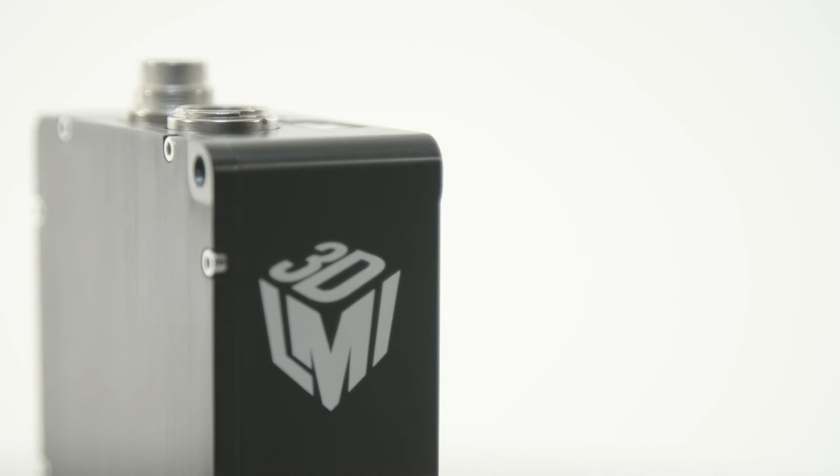I want to give you a demonstration of the Gocator 2300 series laser line profiler, which is a 3D smart camera for 3D measurement and control for factory environments. The laser line profiler is a product from our smart 3D sensor families, and this particular line profiler has a 1.3 megapixel imager in it and gets high resolution, high speed scans for profiling and surface generation. This model, the Gocator 2330, has a laser line generator and a camera, as well as a full processor on board for a complete tool set to allow a user to craft their own applications on board and do measurement and control in a factory environment.

So let's get started. We're going to set up a gantry and start scanning.

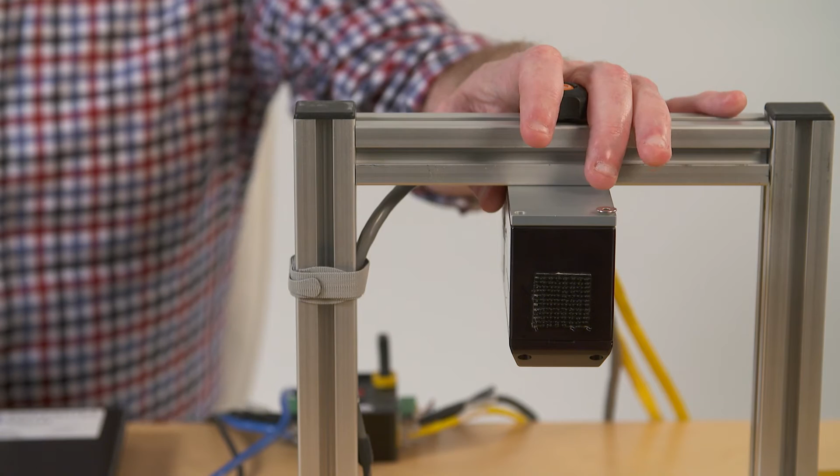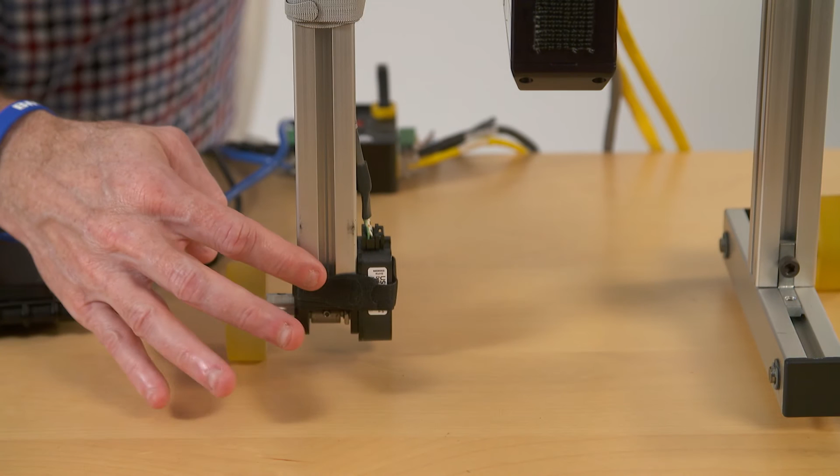We've got the sensor mounted to the gantry at a position where the proper standoff is set up to the far end of the measurement range. On the gantry we've got some wheels, including this wheel having an encoder on it so that we can track our motion when we do scanning.

It's connected through a small connection device and Ethernet into my laptop here. One great thing about the Gocator is that you don't need any separate software to program it. It works off of browser-based software, so any standard browser would allow you to set up your Gocator.

So we've mounted the sensor on the gantry, we've assembled the gantry, and now we're ready to start scanning. I've got a browser window open, in this case Firefox, and we just need to open up a new tab. I'm going to put in the IP address of the sensor, which is a standard IP address that we ship it with. Users can change that IP address to whatever they like. And here's the login screen.

Once inside the user interface, I have a number of screens to go through in chronological order. This is the manage screen, where users can change their IP addresses, set passwords. We have areas where you set up job files, save job files, as well as upgrade firmware, things like that.

Then there's the scan screen. The scan screen is where users can optimize the scan, change exposure, change speeds, things like that, to get profile scans. There's a model screen, which is for pattern matching when needed, and a measure screen. Once the scans are optimized, users can use the measure screen to create profile tools and surface mode tools.

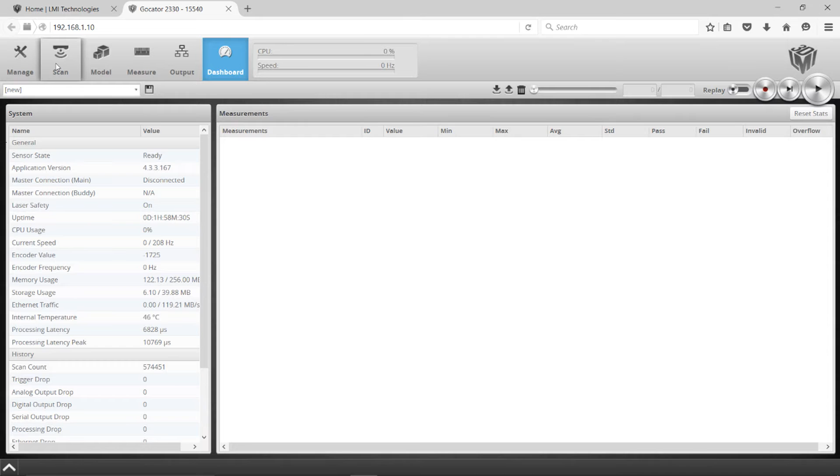So we're going to move back to the scan screen and turn on the sensor. You can see the laser line here, and I'm just going to put my fingers in there and we're looking at a live scan. Right now we're measuring this 200 times a second, so we get over 200 profiles per second. Users can increase that speed. And in each one of these profiles we get over 1,200 points, so we're actually generating somewhere around 250,000 points per second.

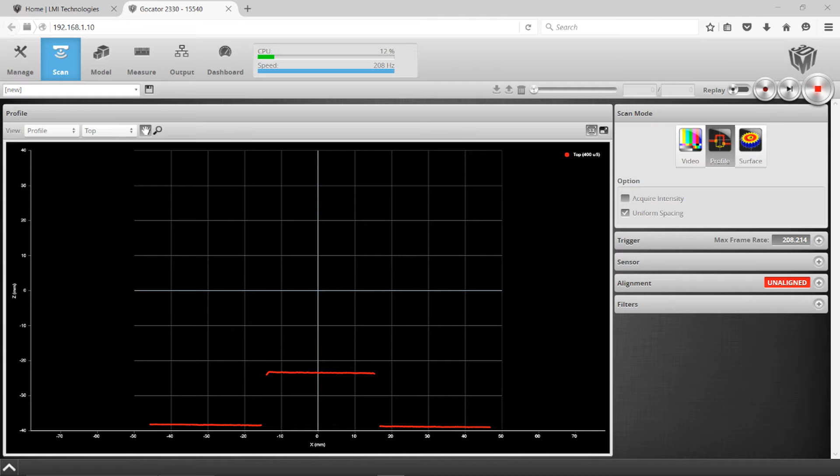Okay, so let's scan an actual object. I'm just going to put this wood block in there under the laser and we'll look at that profile. If I zoom in, you'll see that this profile is made up of individual points. They are separated, with this particular model, by 44 microns, which is the X resolution of this Gocator 2330. And you can see if I zoom very, very far in, those points are kind of moving around — that's within the noise band of the sensor, which in this case is about 10 microns.

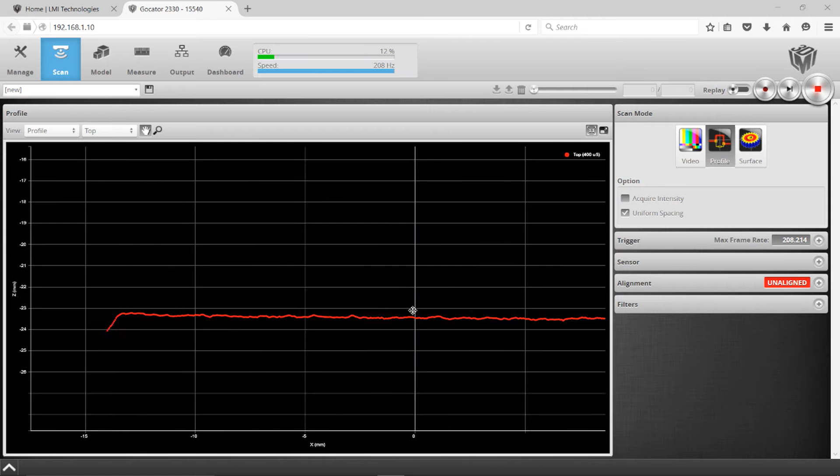If I zoom back out, you'll see this whole coordinate system is part of our factory calibration. On the x-axis is our x dimensions, which goes from about 0 to plus 40 or so, and down to negative 40 — that's our field of view in this case, about 85 millimeters. And the y-axis here is actually our z, or height, plot, and this goes from minus 40 to plus 40 — that's the measurement range of the sensor.

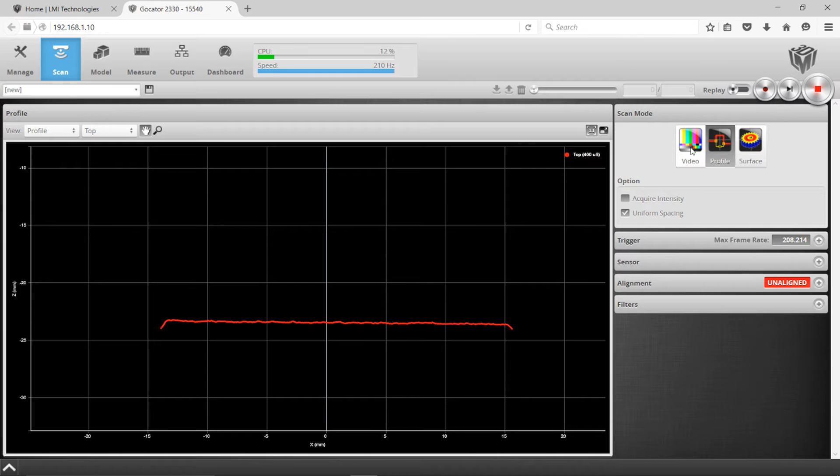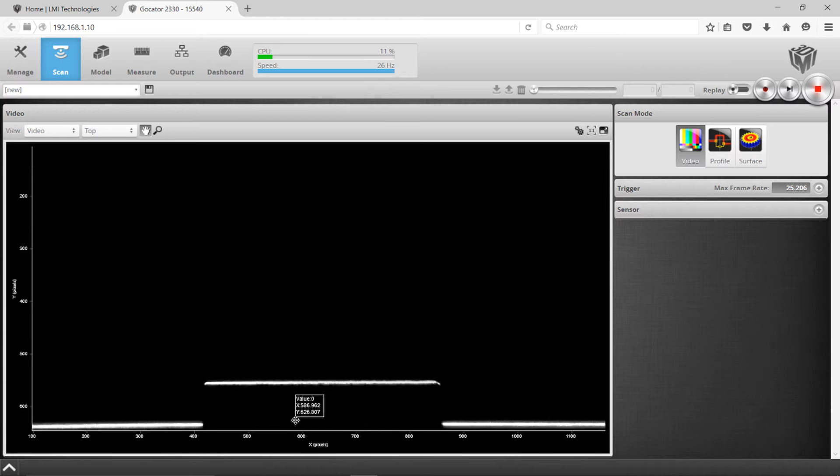You'll see that as I zoom in here, this is the profile. This profile is actually created by the image of the returned light to the camera. If I go into a video mode, you will see the actual image on the camera. This is how we determine the Z positions of the points.

These sensors are mapped out in a factory calibration process. And if I zoom in here, you'll see the returned light on the various pixels of the camera. We actually calculate at each point the center of gravity of light. So if I show those spots, you can see the actual calculated spots. These are done by a very sophisticated process that gets sub-pixel to produce the Z height maps for each profile.

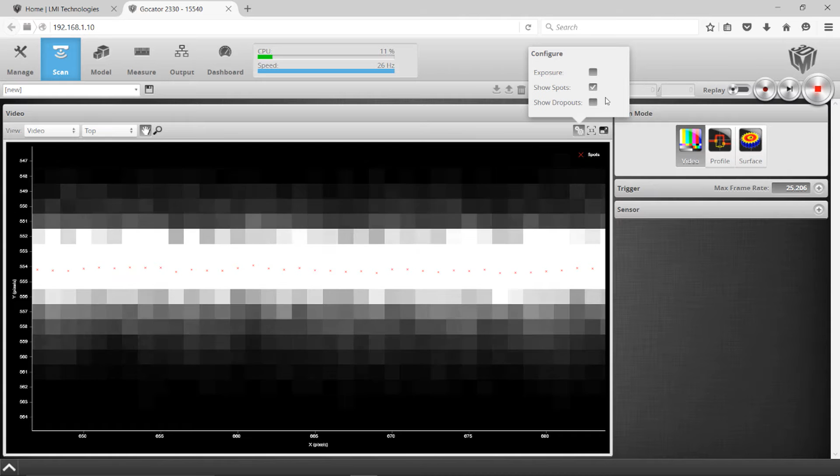So I'm going to go back here into the profile mode, and you'll see that because of the way the sensor is mounted, I have the table, and in this case also the block, kind of at the far end of the field of view of the sensor so that I can have enough room to have different targets of different heights and scan those.

If I really want to align this, so if this was mounted above a conveyor system and I wanted that conveyor to be at the 0 level, I would just do a very simple alignment to that conveyor, to that machine coordinate system. So we have a coordinate system in X and Z, and we can align it to whatever coordinate system the machine is. So to do that, we have a very simple process.

In this case, I'm doing an alignment to a flat surface. We're going to use the table. And what it's going to do is we're going to do a quick line fit to the table and correct for any tilt and also set Z and X offsets as needed.

So if I click the Align button, we will see that we've now straightened out the profile, flattened it, and we've set the table at 0. Basically what it did is it went in here into this transformation function and populated these values automatically. So I am now aligned.

Now what you didn't really see is that it did correct for any angle variance, but because this is mounted so that the angle is basically 0, you didn't really see that very well. So I'm going to clear this alignment really quickly, and I am going to just kind of exacerbate a tilt angle. Maybe I have to mount this sensor in a way where there's some sort of obstruction and I have to come in on an angle. That's fine as long as we correct for that tilt.

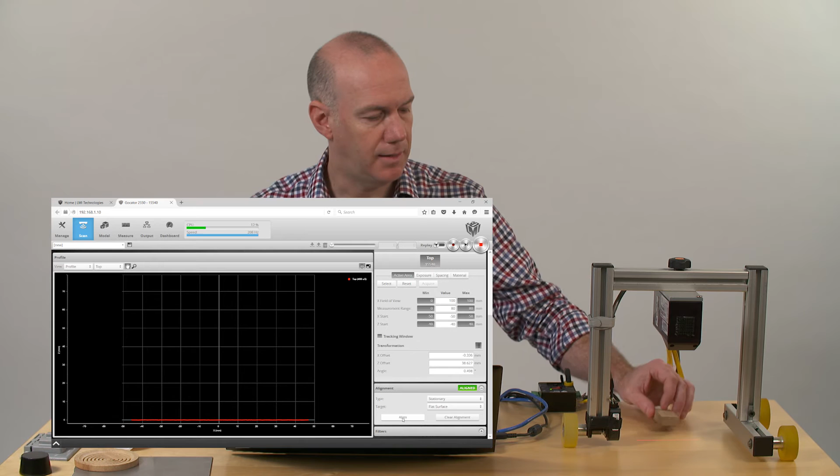Okay, so let's put this wood block back in, and actually before that we're going to just realign to the table. So I'll use this alignment function again, and so we're aligning to the flat surface of the table. And now I'm going to put this block in. We're actually going to make some measurements now.

So in this scan screen we can actually change a lot of the parameters. So currently I'm going 200 profiles per second, but we can increase that. We increase that by either windowing or subsampling, and I can show you that a little bit later. Right now 200 hertz profile rate is just fine.

We can also change exposure. There's various exposure methods that if the targets are of different colors or different reflectivities, we can modify exposure to optimize the scan. Currently the default exposure of 400 microseconds is just fine.

We can also do some profile filtering, which I don't really need to do here, but I can filter this profile to improve the results as I see fit. But this current profile we have on the block is just fine. We're going to use this and go to the measure screen. And so I am in what's called the profile mode.

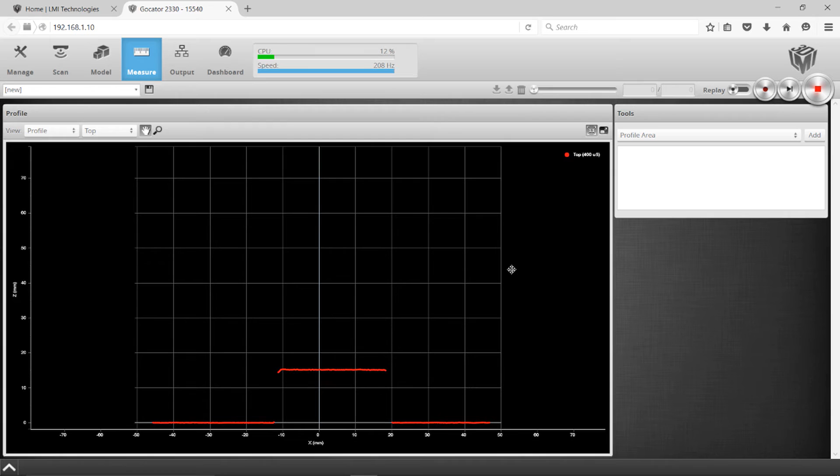So in the profile mode I have a tool set for what we call profile tools, and there's a drop-down menu. I can choose a wide array of tools. In this case, let's create a block height tool. So this is going to be a tool that measures the height of this block relative to some datum, and this datum in this case is going to be the table.

So I'll select the profile dimension tool, add that tool, and now you'll see I have 2 feature boxes, feature box 1, F1, and feature box 2, F2. We're going to get the relative height difference between these 2 features.

So feature box 1, we're just going to change its size. We're going to drag it over here to the table, and in that feature box, first of all I'm going to select height in this tool.

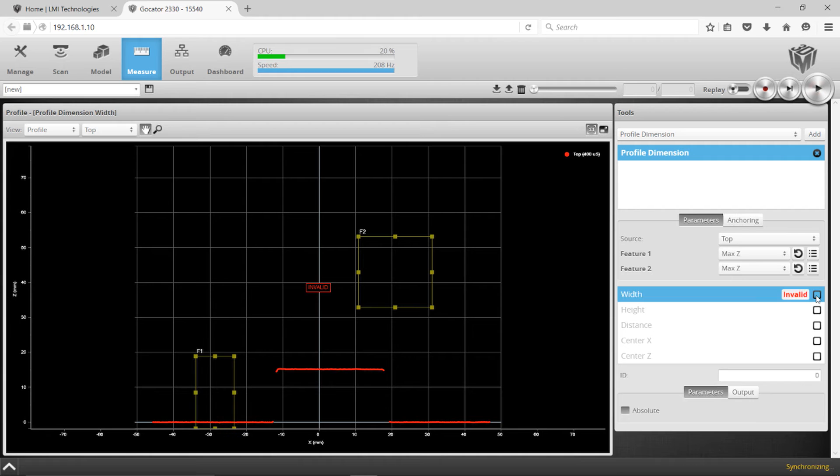And in that feature, I can pick in this region of interest that I've selected the maximum Z, the minimum Z, the average Z. In this case, it makes sense to just take the average. We're getting a number of points across this feature box size, and we're going to average that. And then feature box 2 will do the same thing, but we will drag this on the top of the block, and we will take the average of that.

So we have average height of the block and the table, and we're getting a value of 15.155. That's in millimeters, because this is a factory calibrated device. So we're down to the micron precision level. This sensor is good to about 10 microns resolution, but we actually report our value down to a micron. And here I'm creating that value.

I can also determine if this is within some sort of acceptable range. So I can go to this output configuration and say, I need to be between, say, 14.5 and 15.5 millimeters. So I'll put in a minimum and a maximum acceptance. And you'll see that that number turned green, which means we're in the acceptable range. If for some reason this block was a bit thicker, higher, you'll see I fall out of that range and it turns red.

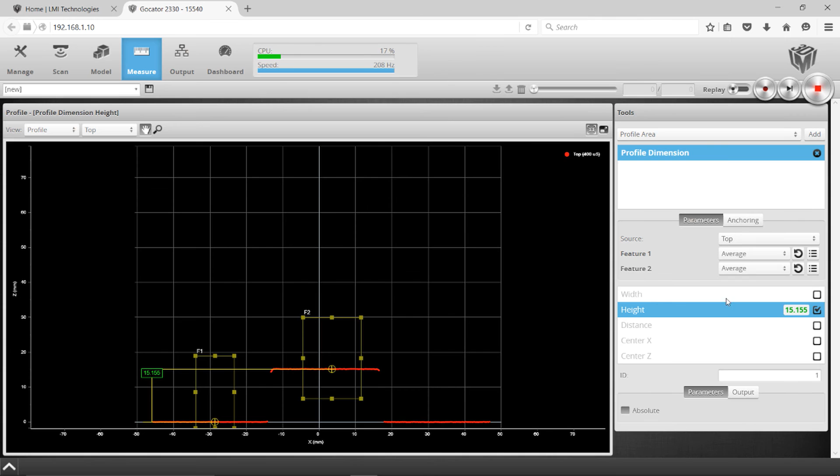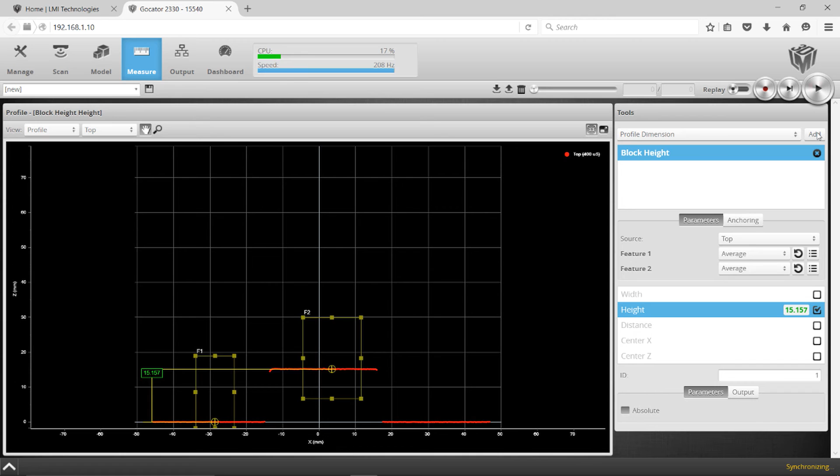So I've got this height tool. I can actually name this tool what I want. So we're going to call it block height. And we're going to create a second tool. So I'm going to go back, create profile dimension, and I'm going to add another tool. And I'm going to call this one block width. So I'll type in block width.

And for this tool, we'll use these same feature boxes, but we will put one on the left side. And in this case, I will grab the min X, so that'll be the far left point. And in the feature box 2, I'll drag it near the right side, and I'll use max X as the feature. So you can see now I'm measuring the width of the block.

You'll also notice I don't see the sides of the block, and the reason I don't see the sides of the block is that I have a fanned laser, and it creates shadows there. That's what we call occlusion. So we can't quite see the sides of the block unless I use two sensors coming in from angles, what we call a buddy system, and we have capabilities inside the sensor to allow users to connect two sensors. But in this case, with a single sensor, I won't see the sides of the block, but I can see the corners here and measure the width.

So here I've got a width of 29.612 millimeters. Again, similarly, I can put in pass-fail criteria, so I'll say I need to be between, say, 29 and 30, and that turns green. And so now these two tools are measuring. We have the height measurement, 15.152, and the width measurement, 29.612.

And if I go back into my output screen, you'll see these two values show up where I can include those in my output, whether it's in the Gocator Ethernet output, or if I go into the Ethernet IP PLC outputs, there is a map here showing the register number and where to grab those values. I can choose to grab the actual measurement values in millimeters, and I can grab the decisions as needed.

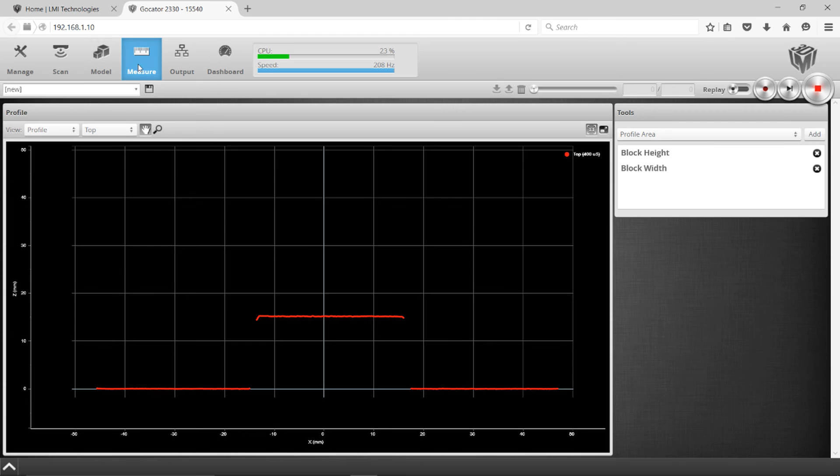Okay, so I'm going to create one other tool, and I want to explain a thing about aspect ratio. As I mentioned, these sensors are factory calibrated, which means that the cameras are mapped, the pixels are mapped through our calibration process so that we know where every pixel is in real world coordinates. So in my measurement tool, I have block width, I have block height.

But one of the nice things is the fact that because we are measuring profiles, we can correct for tilt in that profile. So I'm measuring the block width, but if I tilt this block, you will see basically we're only going to measure the x to x width, which means tilt will actually reduce the value.

So if I want, instead of having a width measurement, I can use what's called a distance. And this distance tool will actually incorporate the tilt into that measurement and keep it correct. That's one of the nice things about measuring in 3D versus 2D. So with 2D vision, I could potentially measure the width of this block with a 2D camera. However, I would have issues with aspect ratio.

And so if I raise these feature boxes up, what you'll see is that my width will not change as I get near the sensor or near the near field area. We're going to maintain that distance measurement. If I were using a traditional 2D camera, we would actually measure a greater width in the near field than we would in the far field, just based on aspect ratio. Otherwise, you'd need something like a telecentric lens. So the distance measurement and the fact that we have a factory calibrated environment means that we can measure that width distance no matter where we are in the field of view.

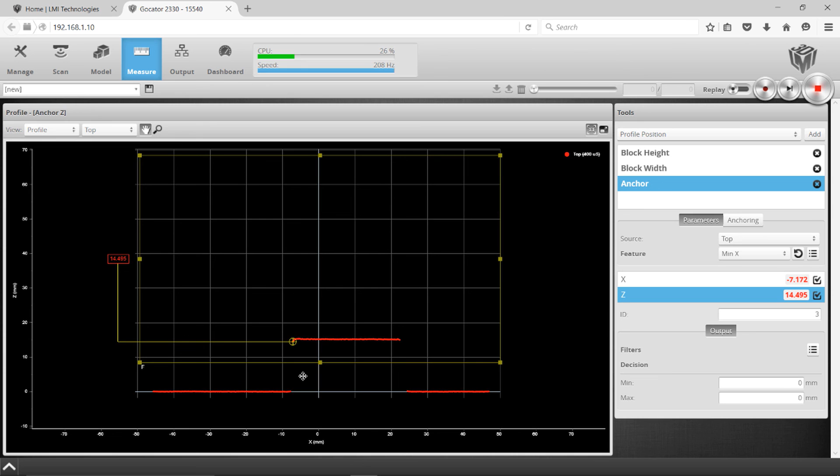This also works for the height tool. So if I go to that tool, I can also anchor that tool to the X anchor. So now both tools are anchored. Now these are just anchored in X. We can also anchor in Z. So if I go back to that anchor and I create a Z value, now it's using that same position tool to create a Z value. Again, we're going to use the left edge, which is just fine.

And now I can go into the block width and also anchor it in Z. So I'm X anchoring it and Z anchoring it, so I can actually move this block anywhere within the region of interest and measure its parameters, measure its width and its height.